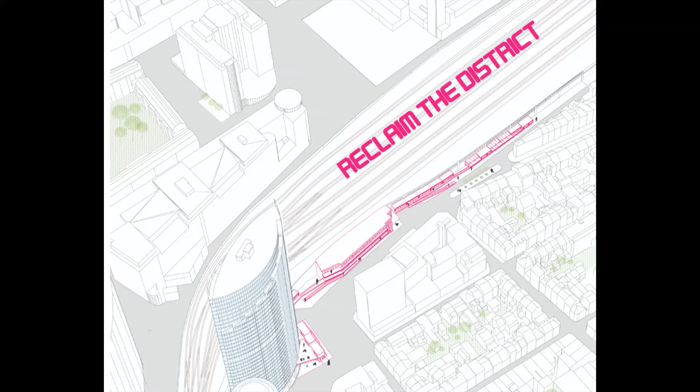Reclaim the district, blending with the existing, repurposing obsolescence.

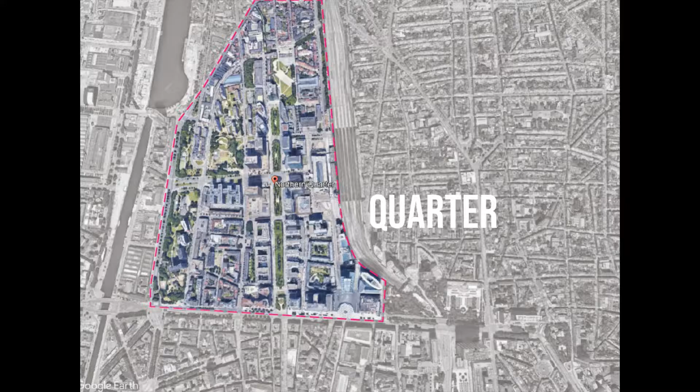In Brussels, a controversial concentration of high-rise buildings make up today's North Quarter, consisting of the financial district and the residential commercial area, a disrupted urban tissue separated by the railways of the North Station.

It all started in the 1930s, when the concept of creating a financial district was being considered, but it wasn't until 1962 that the first Manhattan Plan was proposed, offering 8 skyscrapers that would make up the new financial district of Brussels. Shortly after, in 1964, the demolition of many homes in the area started, evicting approximately 15,000 people without the possibility of relocation.

Since then until today, the district has been continuously filled with obsolete towers, the latest one being the Iris Tower. Built regardless of the needs of its users and other present social issues in the area, it has been considered obsolete before it was even finished.

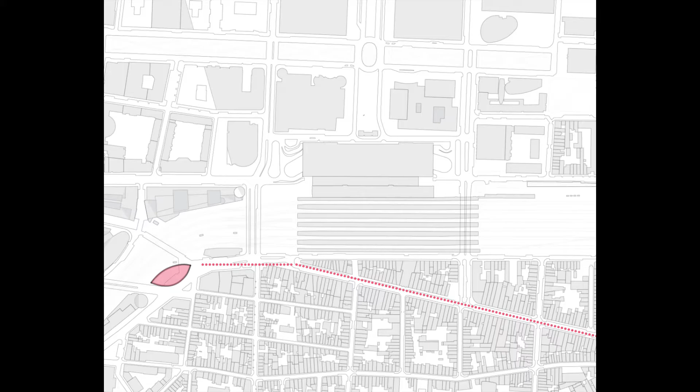Yet interesting enough, we find it on the other side of the railways, connected to a famous commercial place, the Brabant Street. It's not only mostly commercial, but a very busy street, located in one of the most diverse municipalities of Brussels, where 40% of its residents are of foreign origins.

Such residents mostly come from Northern Africa, the Middle East, and Turkey, making the Brabant Street one of the most diverse places in the city, attracting thousands of visitors every single year, coming from different parts of Europe. And here, many can find their favorite products from their home countries and even speak their own language.

But what do the users say about this area? We conducted a couple of surveys along with my groupmates Sasha and Lucy in the Brabant Street.

While some users enjoy many positive aspects of the street and wouldn't change a thing, there were also many that mentioned feeling unsafe at times. But why unsafe?

Let's analyze the street in order to determine if it can be considered as unsafe or not. The first 3 factors of a safe street are appropriate level of activity, glass shopping windows, and good lighting in the street, which we do find. Now, thanks to the houses along the street, we can count with natural surveillance. We find also very well-defined routes and enough parking spaces.

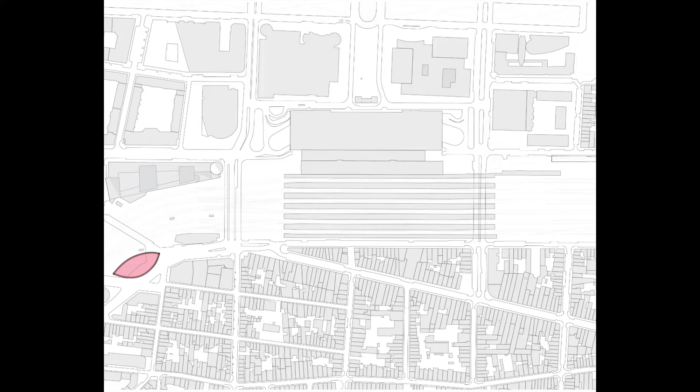So where is the unsafety coming from? We have a constant activity in the Brabant Street.

Now, what about the neighbor one, the Aarschot Street? We find it facing the North Station of Brussels, but unlike Brabant Street, this is not filled with shops and movement, but is actually where an uncontrolled and uncondensed district takes place.

The Brussels Red Light District.

The red district of the city has occupied this street even before World War I, attracting unwanted crowds, human trafficking networks, and violent disputes. The police constantly circulates this area in order to keep things under control, yet the feeling of unsafety has already taken over, making both residents and commuters of the station very uncomfortable. Until today, it remains a neglected street.

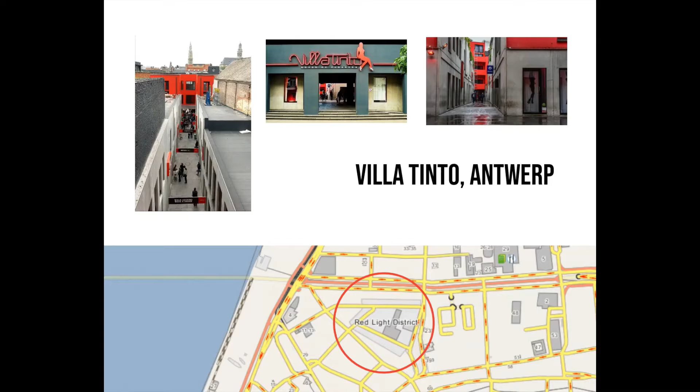A better example in Belgium of an organized red district is Villa Tinto in Antwerp, and here the activities have been concentrated into 3 streets, allowing it to work in a much better way than in Brussels, offering an on-site police station and constant control of the workers. According to Thrillist.com, it is considered the cleanest and safest red district in the world.

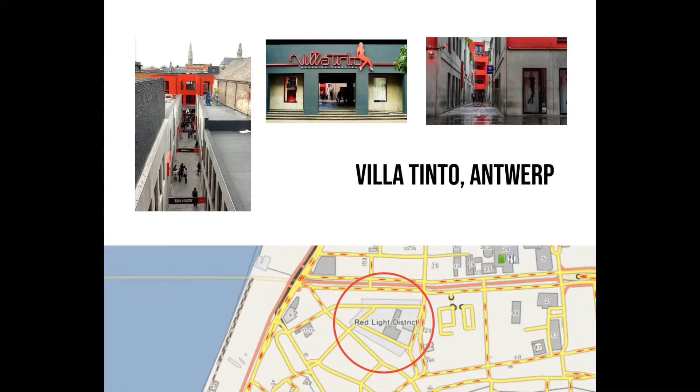Now, how do we reclaim the district? I started with action layers.

The first one was brainstorming for ways to relate to the commercial Brabant Street and how to tackle the current issue of unsafety. Following was the proposal of an architectural intervention that would bring back the 2 streets together and finalize in the Iris Tower. Then, the intervention would also bring the community together by empowering them to share their cultures with others.

Then, spread the word. Tourists visiting the Brabant Street will now also be interested in discovering the new things that the district has to offer and tell it to their friends.

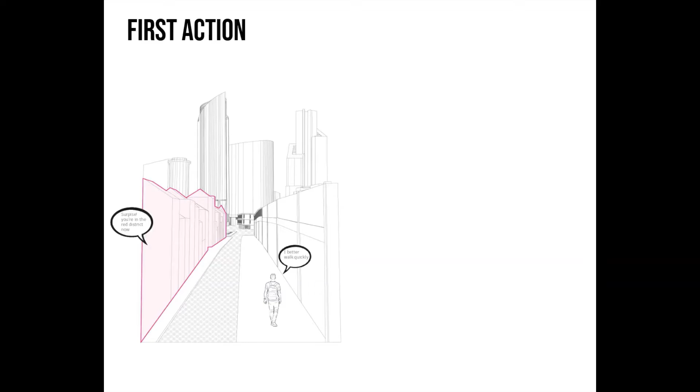A place for diversity is the last step, where the obsolete Iris Tower will now welcome an immigrant center where people can share their stories. But how? If the red district in the Aarschot Street seems to be the root of unsafety, why not move it into the Iris Tower? In this way, the street gets an opportunity to be revitalized and reconnected once again to the commercial Brabant Street.

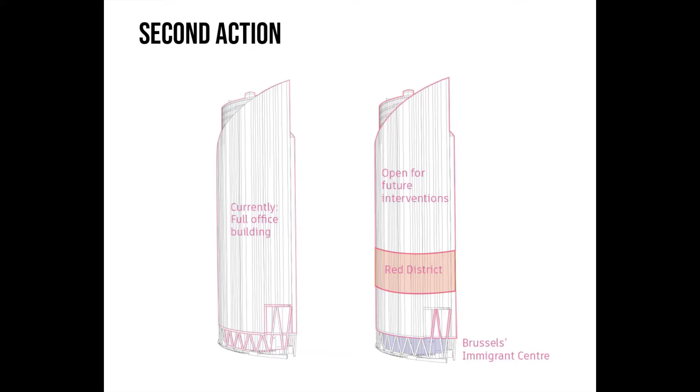The placement of the red district can be a future consideration. However, a proposal of an immigrant center where users can share their stories can be the first step into making the building more welcoming. In order to achieve that, I decided to create modules that can take up different functions, but at the same time connect with the commercial character of the Brabant Street.

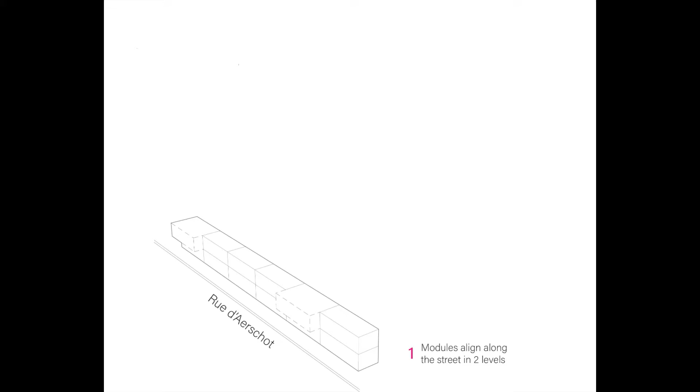These stackable modules will be placed along the railway wall of the Aerschot Street, connecting through balconies that would allow inner and outer circulation flow. Some modules can be opened up and left as open spaces that can be used for outdoor markets and other activities. Both levels would be connected through ramps and stairs, allowing a more dynamic streetscape to take place.

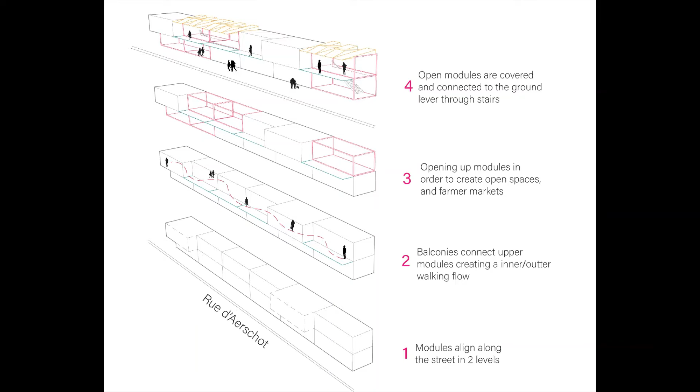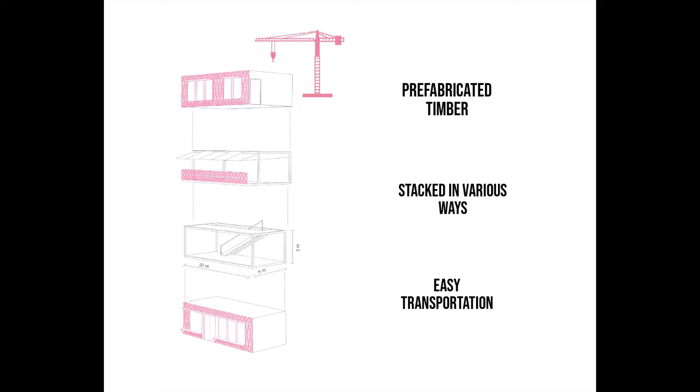Now, what are they made of? All modules are made of prefabricated timber, giving a warm touch to the street. They are also easily stackable and can be placed in different ways thanks to their rectangular shape. And lastly, they can be easily transported into the site and placed by cranes.

The facade of the modules has an important aspect to it, representing the weaving of cultures through its wooden detailing, a pattern that will unite the project as a whole and weave it together. When it comes to the structure of the balconies, they will count with an outrigger beam that will be supported by a metal cable in order to provide a better support.

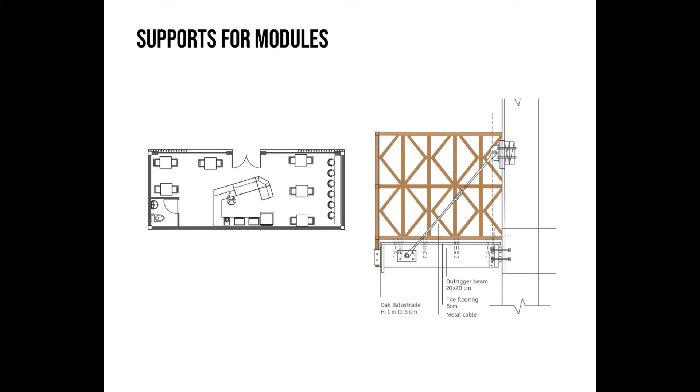Now, let's weave the project with modules. The starting point takes place at the end of the Aerschot Street, blending back with the Brabant Street, connecting to its commercial character. An old building belonging to the railway company will adapt some functions in its front facade.

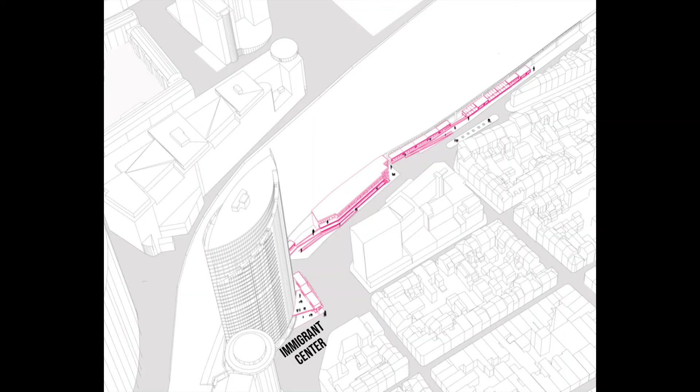And finally, we reach the Iris Tower, placing some modules in front of it in order to overshadow its unwelcoming glass facade. These modules will adapt to the colors of a nearby street art.

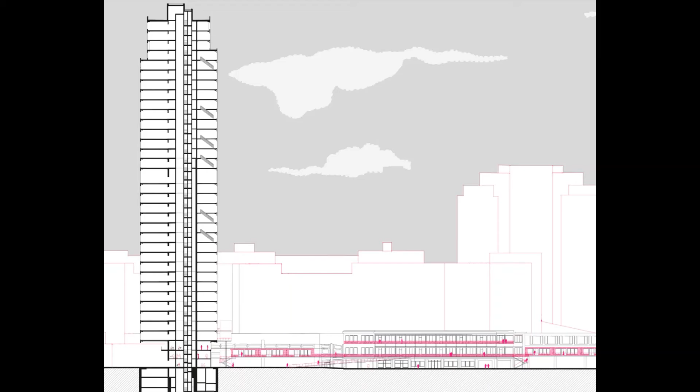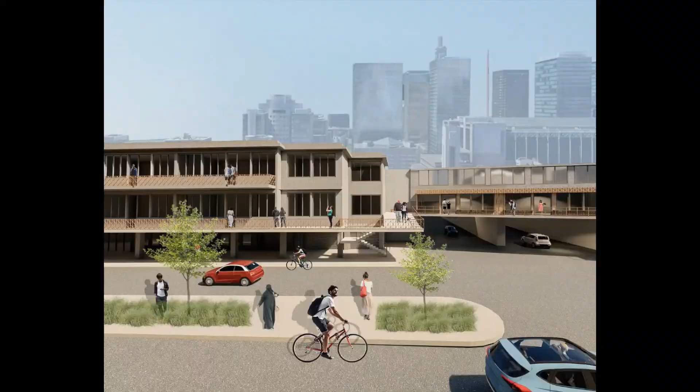And last but not least, let's take a walk in the district.